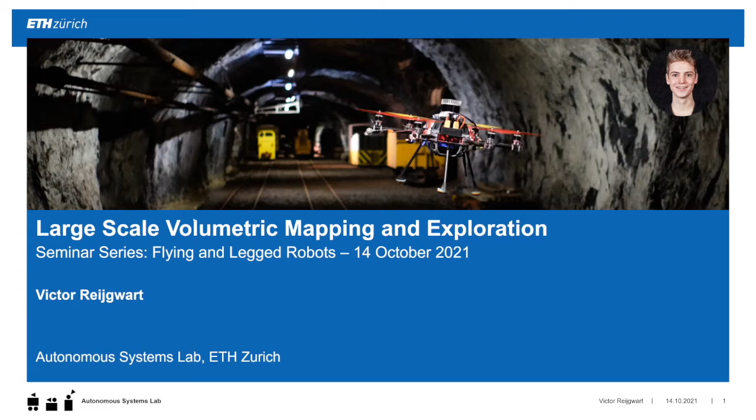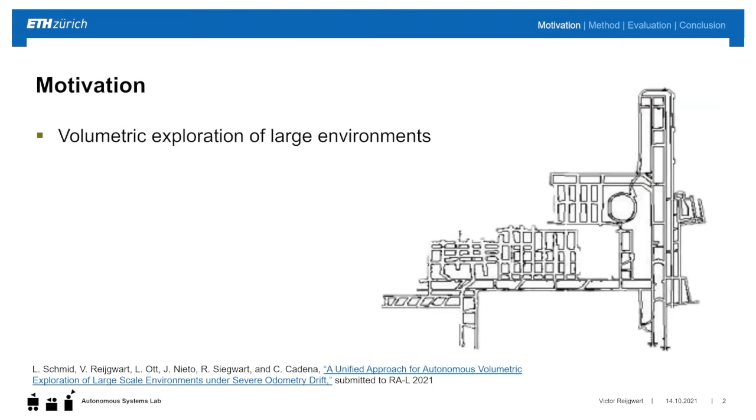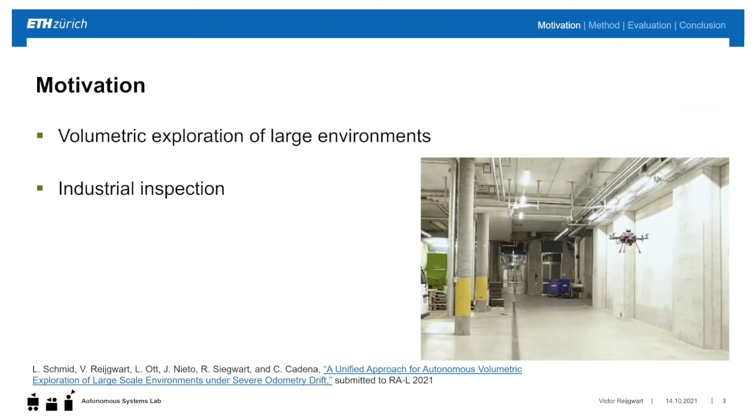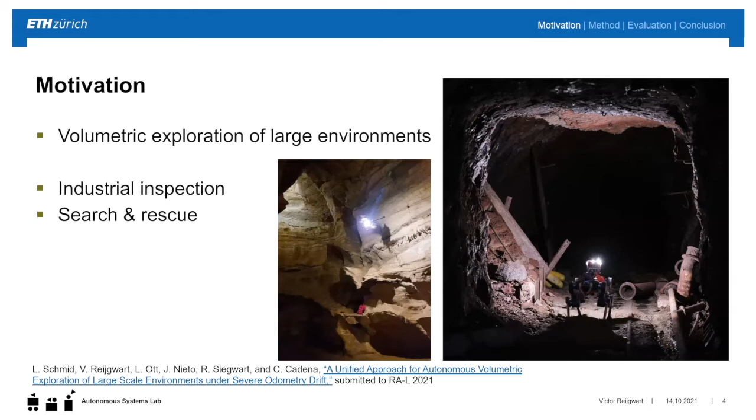Okay, it's working again. So what I'll be talking about today is volumetric exploration of large environments, such as, for example, the mines of the DARPA Subterranean Challenge. And some of the use cases for the results that I'll present would be industrial inspection or search and rescue, which is, I think, a very interesting problem, both technically and also in terms of how it can be used.

So some of the big challenges that we have here are, starting with drifting state estimation. So on mobile robots, in real unknown environments, we typically have to estimate their pose using only onboard sensors. And here, over a longer amount of time, it's almost guaranteed that there will be some drift that gets introduced in their original odometry estimate. So in this small video that you saw on the right, I'll see if I can play it again.

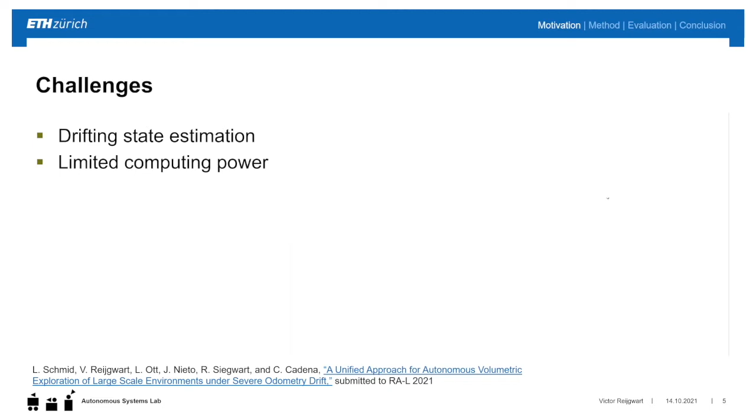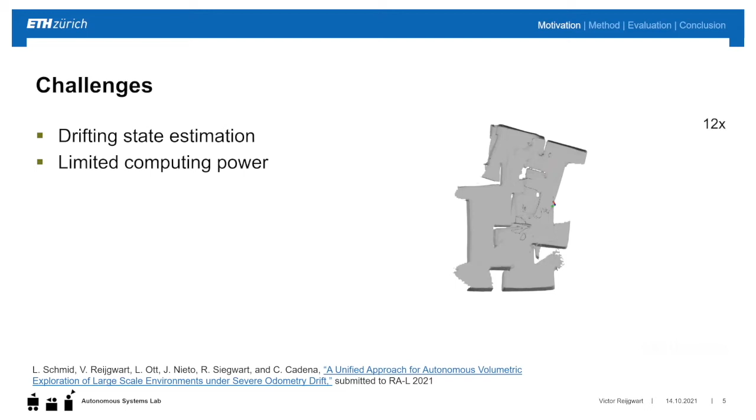You could see that this drift in the estimated position of the robot can also corrupt the map, which eventually could lead the drone to collide with the environment, which is something that for safety reasons we really want to avoid. And then another big challenge on mobile robots is that the computing power is typically very limited, especially on aerial platforms. So in summary, what we wanted to achieve with this work was to create a safe and efficient volumetric exploration framework that functions well despite severe odometry drift.

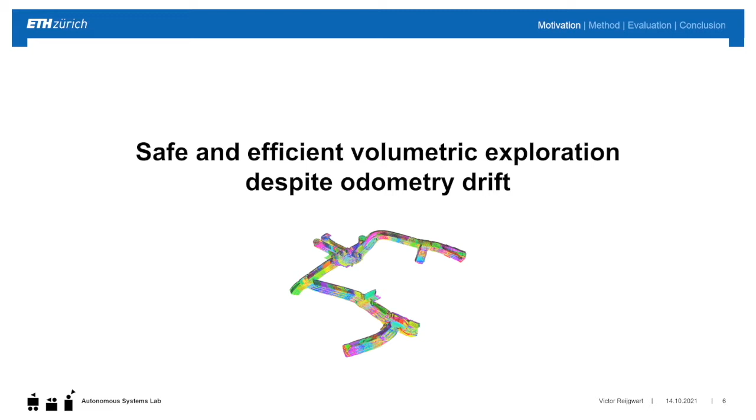So jumping into the system overview, we had two main ideas when developing this. The first one was that we wanted to create a multi-layered approach that tightly integrated both mapping and planning to make the best possible use of the information that the map provided to make the planning more efficient. And this led us to break down the system into three mapping components and two main planning components, which I'll discuss in detail later.

And then the other idea that we wanted to try out was to see if we could break up the problem into the local parts and the global parts and solve them quite independently. And I think the results on this were quite surprising to us, at least. So I'll show those later.

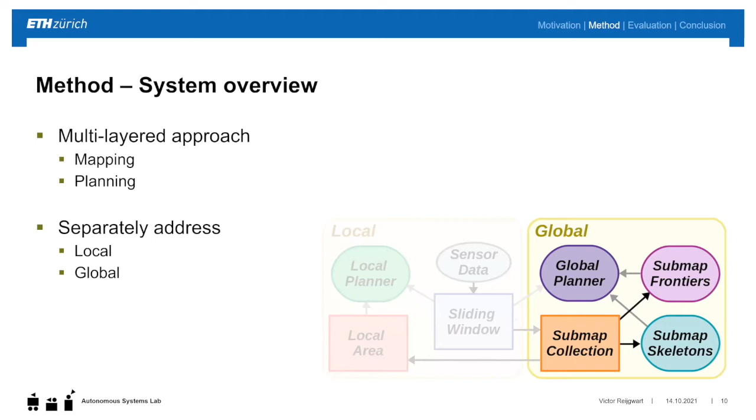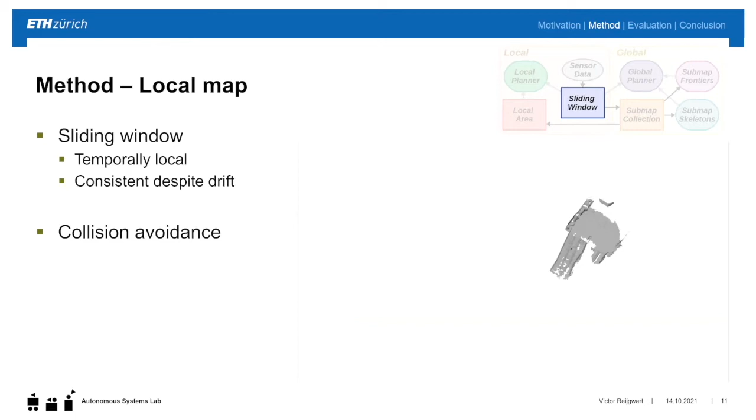So starting with the map of the immediate surroundings of the robot, we chose a sliding window based approach, where we keep all the point clouds that get integrated into this volumetric map in a buffer. And once they leave this buffer, they get removed from the map again by essentially just reversing the TSDF integration equations. And the big advantage of this was that it gives us a map that is local in the temporal sense, and therefore stays consistent, even if there's drifting odometry that causes issues over longer time windows.

So the big advantage of this was that it allows us to avoid collisions, even if the odometry is drifting, because the objects that we would be able to collide with are typically close to the robot and therefore being observed. So thinking about it from a more human perspective, essentially all the obstacles around the robot are still fresh in its mind, so it will not bump into them.

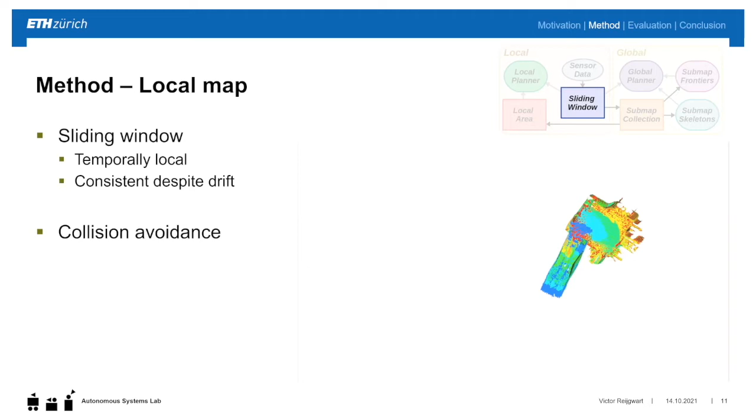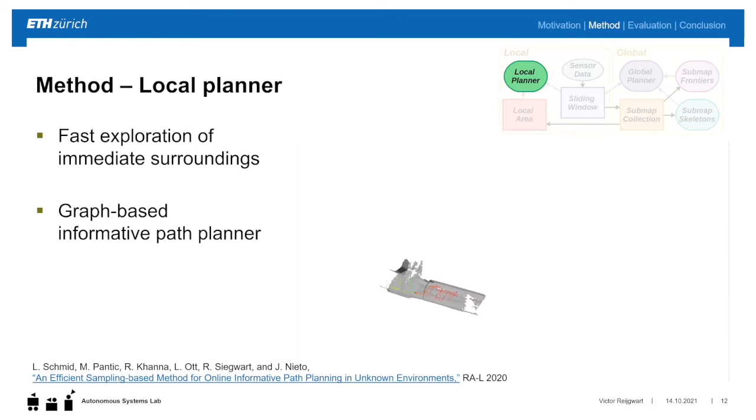Then, of course, we also wanted to have some way to explore, and here we started with a local exploration component, whose goal was to enable fast exploration of the robot's immediate surroundings. And one recent work by my colleague that I worked together with on this project as well was a graph-based informative path planner, which we used here.

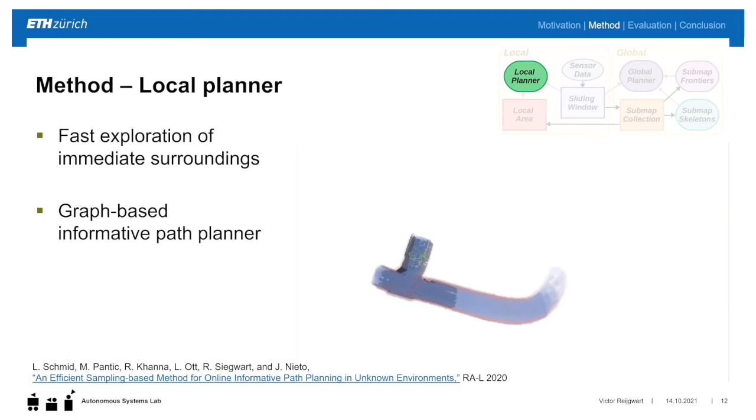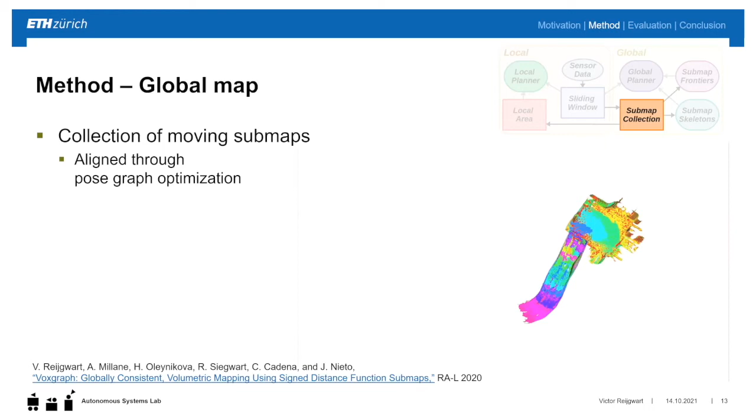And then on the mapping side, we also needed some representation of everything that the robot observed so far, to be able to make sure that it would explore not just some parts, but really everything. And for this, we used some initial work from my side on Voxgraph, which was a framework that makes it possible to describe the world as a collection of moving volumetric submaps that are aligned through pose graph optimization.

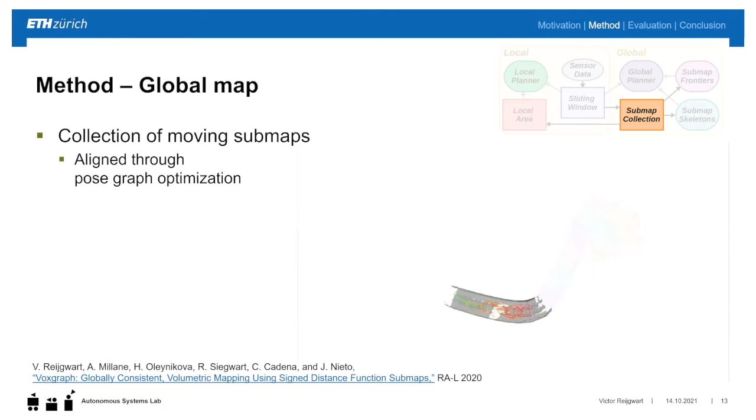So the advantage of this framework was that it introduces an efficient way to represent the entire world in a volumetric sense, but it still allows the map to be deformed to take information from, for example, loop closures or a larger SLAM system into account.

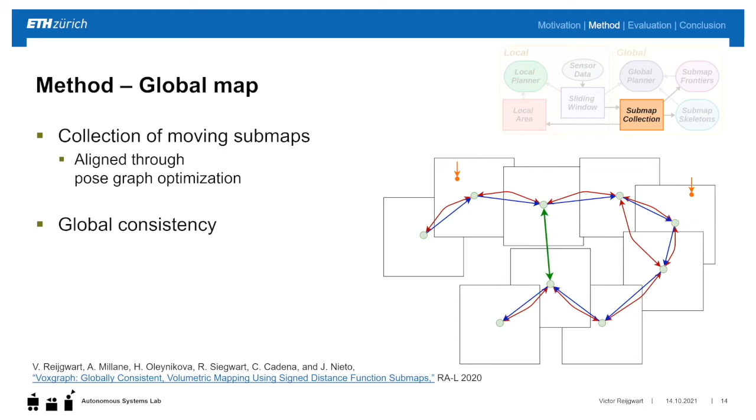So this loop closure information is not available at the time that the sensor data is initially captured, and only becomes available at a later stage. And then once it is there, we would like to deform the map essentially to improve its consistency. And this is made possible with Voxgraph, even online on small robots.

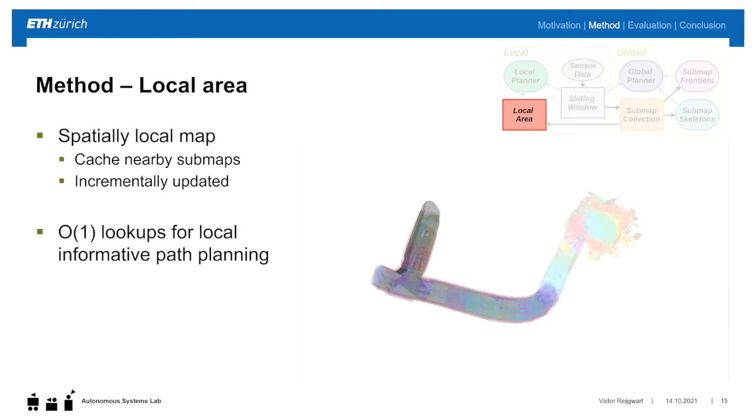Then one challenge for the informative path planner, so for the local planner, was that it evaluates places to go next by computing the information gain at certain viewpoints that it sampled. And for those of you that are familiar with this approach, you will know that this requires the code essentially to perform really large numbers of lookups in the map, because it typically computes it by ray tracing from a given viewpoint throughout the surroundings to see what the sensor would be able to see at that point. And this approach is already very expensive.

It's typically the bottleneck in most volumetric exploration approaches. But for us, if we naively use this global map with all the submaps, it would scale linearly in the number of submaps, which would make it intractable.

So what we propose to do instead is that we introduce a second type of map, or a second layer of mapping, which we call the local area, where we initially fuse all the submaps in the global map that are close to the robot together and update this incrementally. So if the maps move, we don't recompute everything from scratch, but we only update the maps that move by removing them and adding them again at this new pose.

So this made it comparatively actually very cheap to run. And the big advantage of this was that it allows us to, again, perform constant time lookups for evaluating these viewpoint gains, as if we were working with a single large monolithic map.

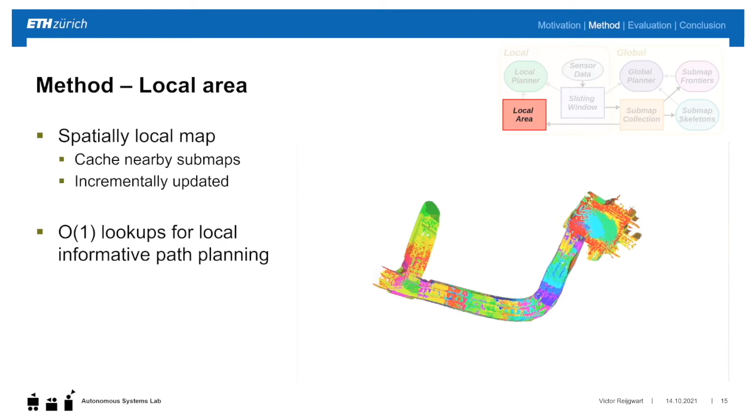Then the final thing that we want to achieve is that we cover the whole environment. So for this, we have a second planner that does the global planning, and it's based on the very common concept of frontiers, with some small modifications to, again, work well with this submap-based global map representation.

So instead of recomputing the frontiers over the entire map every time that it deforms, what we propose to do is that whenever a new submap is added to the global map, we extract frontiers on this submap, which is very fast, as the submaps are typically quite small.

And then at the global planning stage, the only thing that we then still need to do is to check for those frontier candidates only, whether they are still valid frontier points. So this is very quick. It runs in the order of hundreds of milliseconds, and then allows us to still guarantee global coverage.

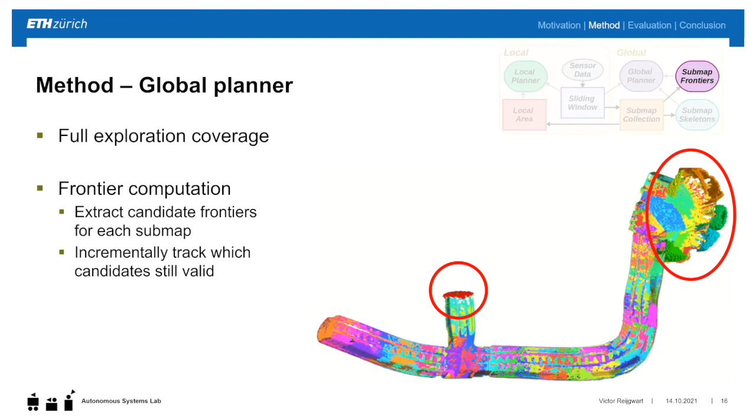Once we know where we want to go, which would, for example, be this frontier in the middle, which is red, or any of the 4 frontiers in the right upper corner, we needed some global path planning approach. And what we used here was an extension of a previous work of one of my colleagues, Laura, on creating sparse topological graphs and using these for planning,

where we create one such topological graph or skeleton for each submap, and then extend the A-star search to be able to jump across submaps. So it would essentially plan in one submap, and then as it reaches an area that's also described by other submaps, it can jump across.

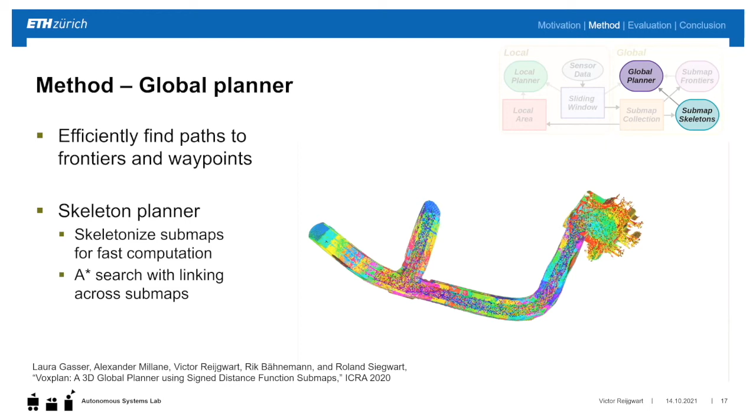And this made it possible to efficiently relocate the robot either from its current position to a new frontier or to an arbitrary waypoint, which could, for example, also be the homing position. Now that I've briefly discussed how the system comes together, let's look at some evaluations to see if it actually works, and especially if our assumptions hold.

So we evaluated it extensively in simulation, because there we don't have to worry about crashing the drone, and we have access to more information for evaluations. So what we used was the Unreal Engine 4 together with AirSim and a custom wrapper to interface it with ROS, all of which, or all the modifications, are publicly available as open source.

And then we ran this, because the simulation is very expensive, on a big server computer with an Intel i9. But I think more interestingly, we also tested it on a real platform, which I forgot to update the name, but it's called Kiwi. It's a hexacopter from the MAV team in our lab with an OS1 64-beam LiDAR and a small Intel NUC i7 computer.

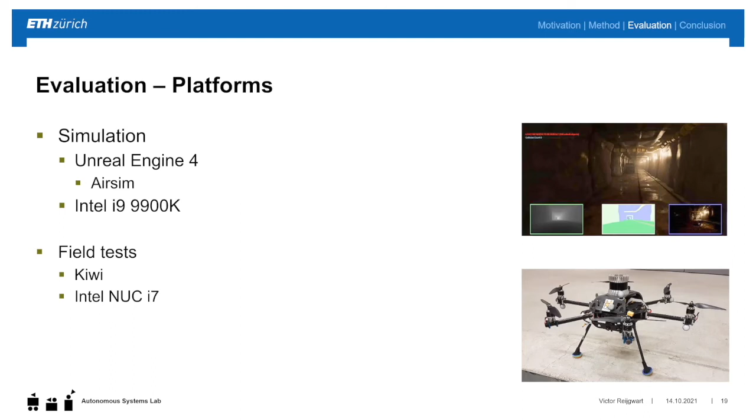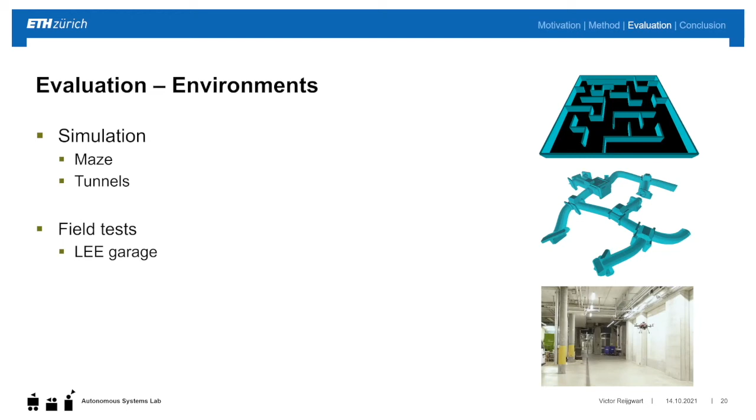So in simulation, we evaluated on 2 environments, the first one of which is a maze to allow more intuitive comparisons to other planners and other papers. And then we also tested the system in a very large tunnel network-like environment. And for the real tests, we have by now tested it in quite a few different environments, but I think the most interesting one for this presentation was the LEE garage, because there we have the most metrics.

Then we compare against 2 existing approaches, which we considered to be the state of the art, at least at the time of writing this paper. The first one of those is Active3D, the paper that accompanied the work from my colleague, which introduced the graph-based informative path planner we still reuse here for the local parts. It's based on expanding and rewiring a single tree in an RRT star-like fashion, optimizes the utility in a global context, and is mainly focused at high performance. So there's no safety considerations there.

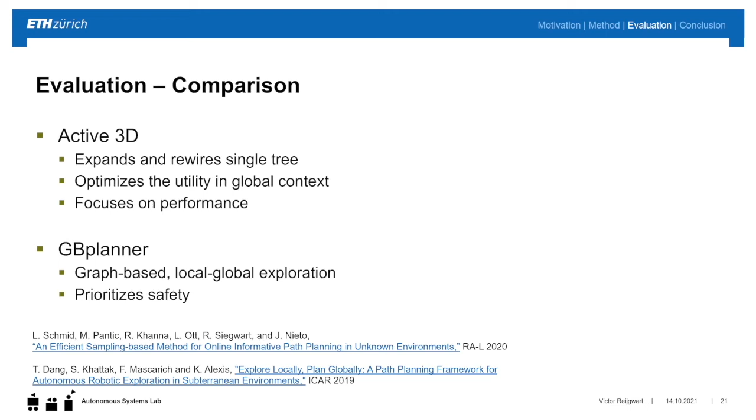Then on the other hand, we also compared to GB Planner, which is also a graph-based planner, but the nice similarities are that it also uses this concept of local and global exploration, and is mainly focusing on improving safety.

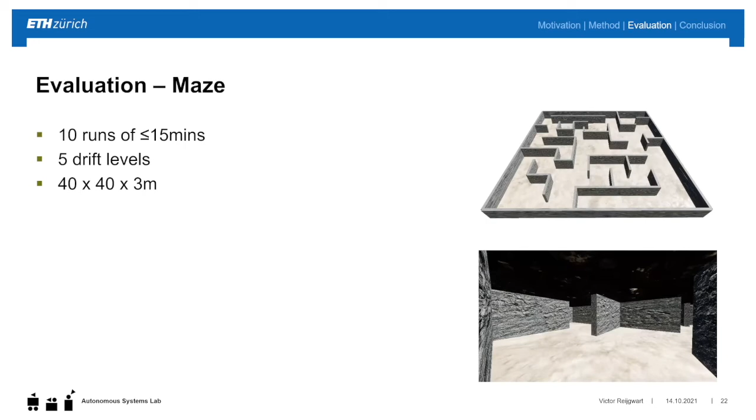So the maze environment measured 40 by 40 by 3 meters, and we simulated 10 runs under each configuration, capped to 15 minutes, because otherwise it would just take too long. I think this already took several days to run. And then we simulate 5 different levels of drift for our planner and the 2 planners that we compare to.

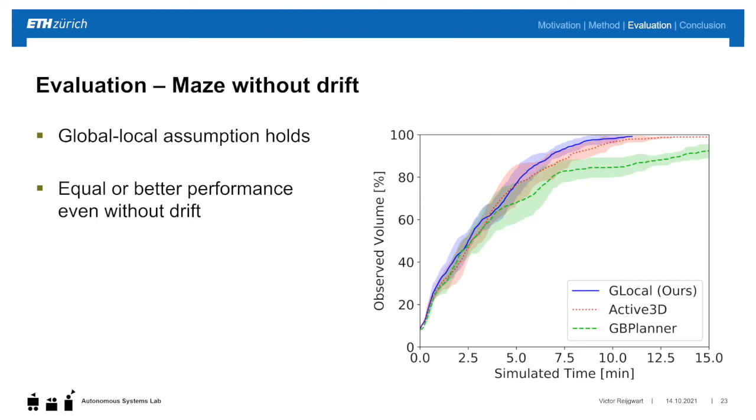So I think the most exciting finding for us was that the global-local assumption actually holds up very well. It holds up so well that it outperforms the local approach only, even if there's no simulated drift. We'll see later that it's mainly a lot safer, but it's also very fast, and perhaps even faster than other approaches. Then things get most interesting when we start looking at what happens when we simulate drift. So we simulated 5 different levels, starting with no drift at all, up to very severe drift.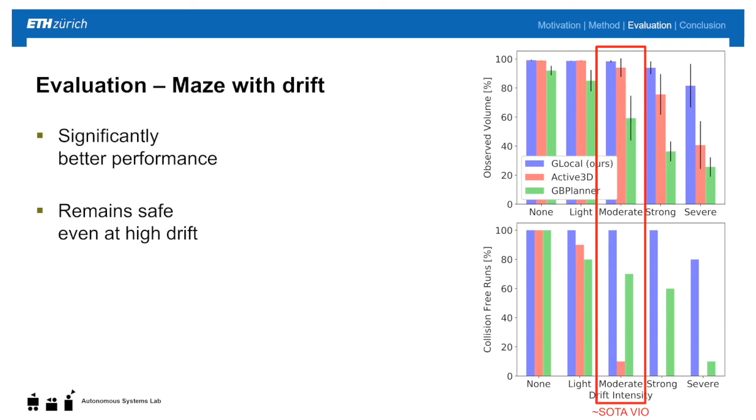And the first thing you would see is that the performance of the exploration, so the amount of observed volume over time, holds up much better with the approach we introduce compared to other methods. But most importantly for us was that it remained safe even at high levels of drift. And to get an idea of how large the drift was, I think state-of-the-art visual inertial odometry systems would have a drift level that roughly corresponds to what we labeled as moderate.

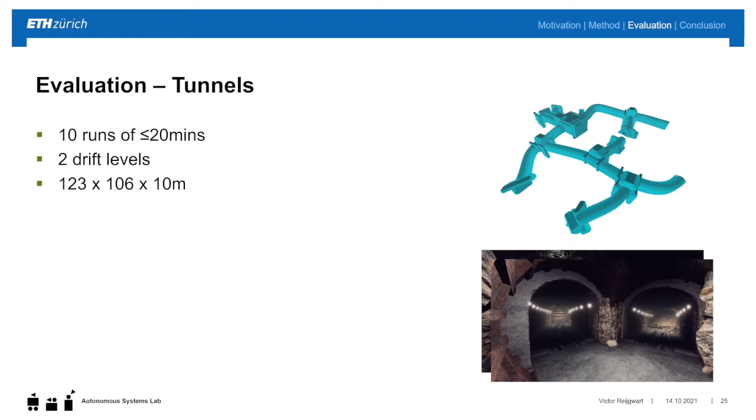So then in the tunnels, we again simulated 10 runs, but because the environment was so much larger, we truncated it to 20 minutes and only simulated 2 levels of drift, no drift at all and a moderate drift. This environment measured 120 by 100 meters and had height differences of up to about 10 meters. So you can see in the pictures that it's essentially a large network of tunnels with some intersections and many dead ends, which are interesting for exploration.

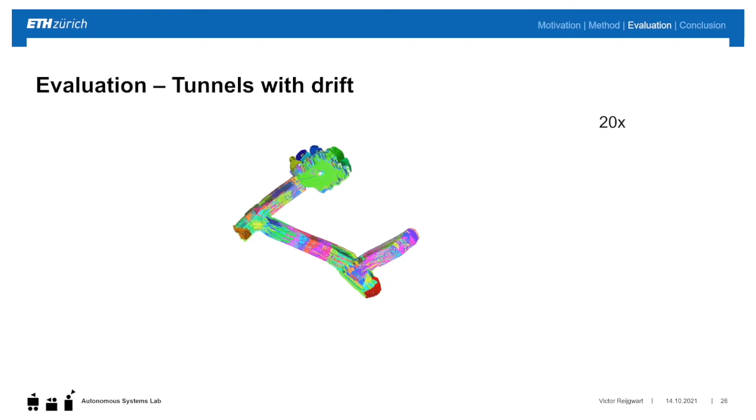So showing you first some qualitative results when we do simulate drift, you can see that the approach works well, and mostly explores using only the local information. But whenever it gets stuck in a dead end, it identifies frontiers and then relocates to them. So at the bottom, that frontier is not reachable due to some temporary corruption in the map due to the drift that we're simulating, but you can see that it then successfully picks another frontier and continues from there.

And even though the drift is very large, you see that the map slowly recovers and the planners keep functioning as if there are no issues with the map. I think the code that we were running here for the mapping has been improved quite a bit since this video was made.

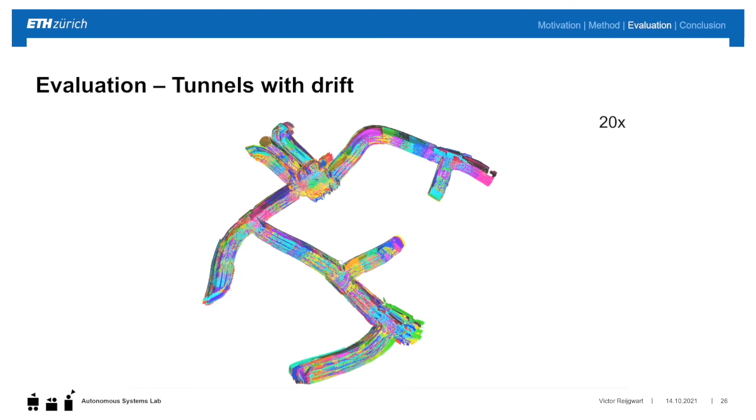With the newest versions, you will not see it move around like this anymore. But for us, it was actually quite interesting to see how the planner would do if it moves this much. So in this video, it was still noisier.

So then qualitatively, to get an idea of what the effects of the drift would be if we don't compensate for it, on the left you can see that the map gets completely skewed and you get a lot of double walls and essentially different breaks in the map. And if we compensate for it using this pose graph optimization with submaps, then you get a map that looks like it should.

So again, sorry, Victor. Yeah. Can I ask a brief question about the previous slide? I missed what the colors represent in the right. I should have mentioned this.

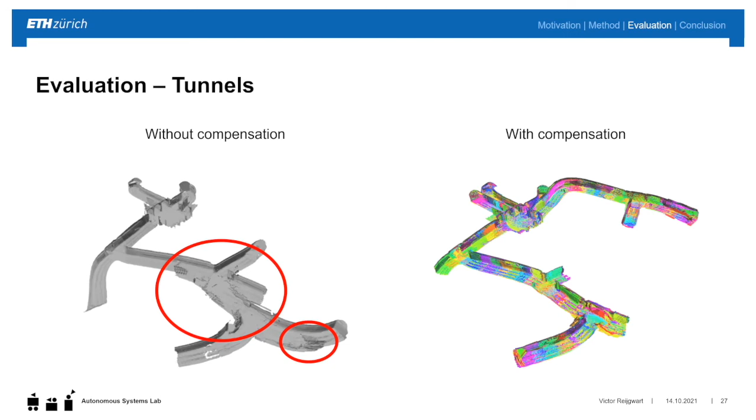So there's many colors because each submap is colored based on a unique ID that it receives, and it looks a bit fuzzy, but this is actually good in general because it means that all of the submaps are aligned quite closely together, and then it becomes pretty much random which faces of the triangle get rendered and which corresponding colors are shown, because these depend on the submap that the mesh element or the triangle belongs to. Okay, I see. Thanks. Thanks for clarifying.

So looking again here at how it performs without drift and then with drift, we can see that the approach still performs very well, even if there is no drift. So again, this reinforces the idea that the assumptions are valid. And we can see that when we do simulate drift, it also keeps exploring. It explores a bit slower, but it still explores well. And out of 10 runs, we only had 1 crash, whereas most other planners either got stuck or crashed within the first 13-14 minutes.

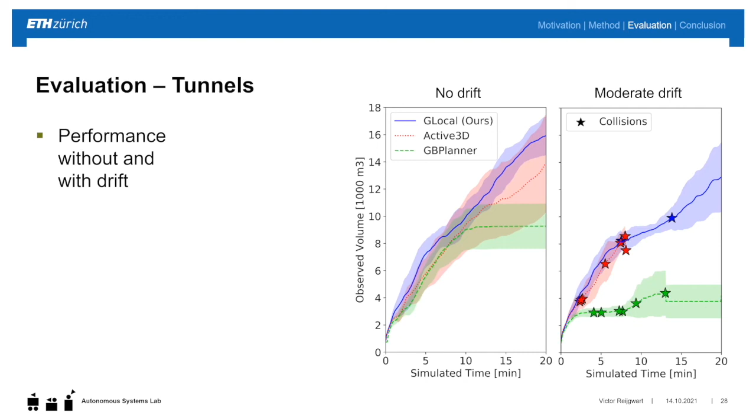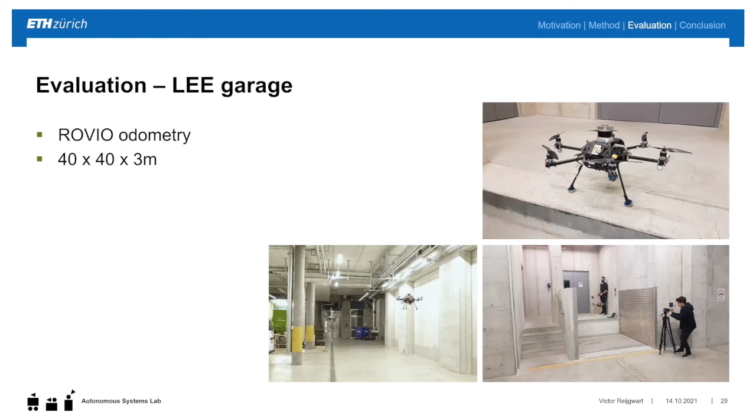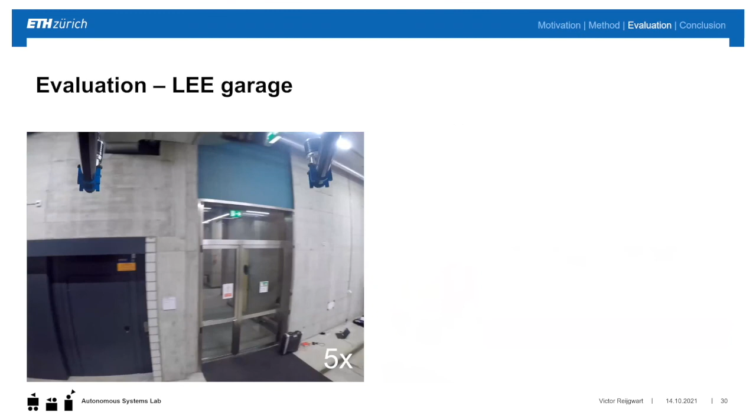So then for the real experiments on hardware, we used odometry from ROVIO and flew in the underground parking lot under our lab. And I'll show you a video to give a better idea of what it looked like. So you can see that the robot plans locally and explores what's around it, but also takes a peek into different corners. And from time to time, the global planner kicks in and essentially brings the robot around a car to take a look at what it can see there.

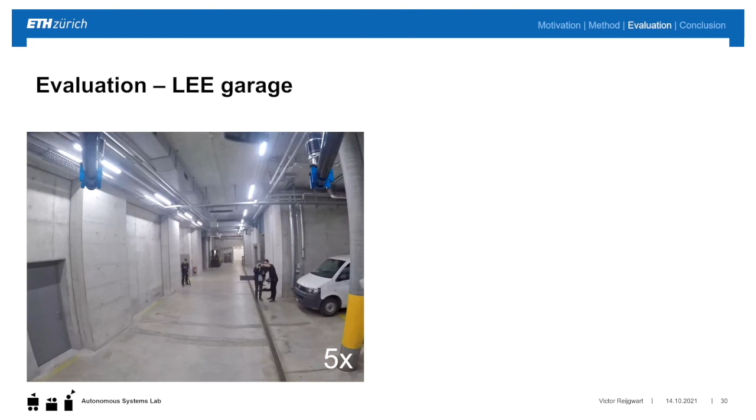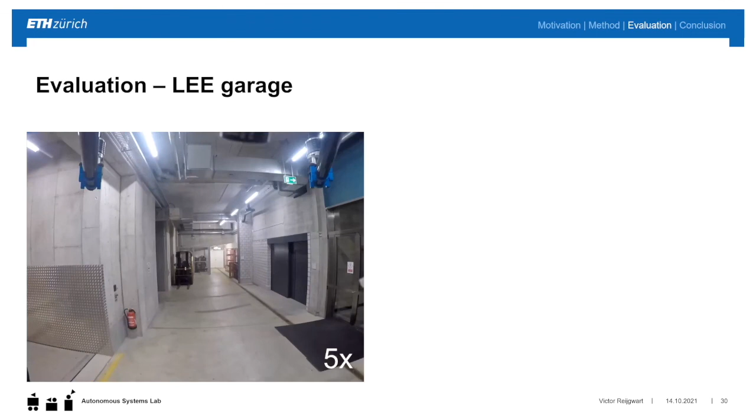I think the camera feed is not giving the best impression of what the robot sees because there's a LiDAR on top that has a 360-degree field of view. But hopefully this still gives the best qualitative idea.

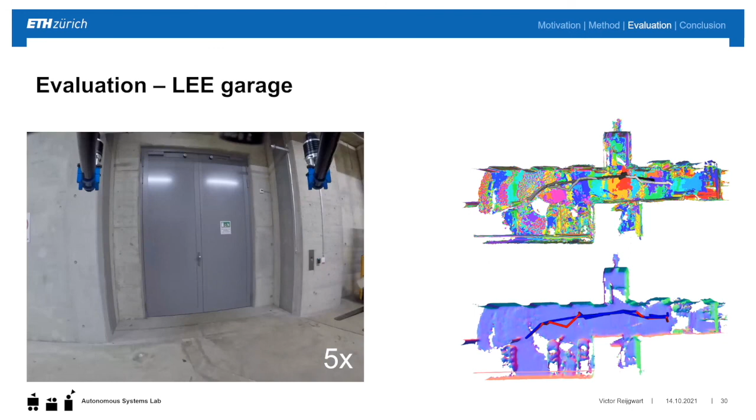So looking at the maps that we got, you can see that it looks like there's a double wall in the top figure, but this is just because, this is a top-down image, there's a section there with a part that sticks out a little bit. But you can see that the map is consistent. And at the bottom in blue, you see the trajectory of the robot in local planning, and in red in global planning.

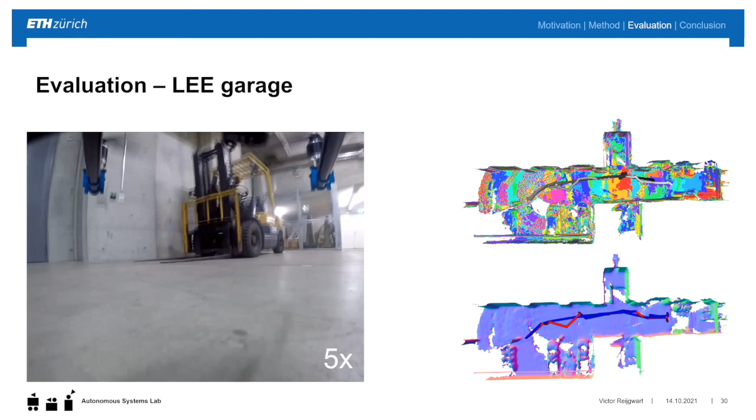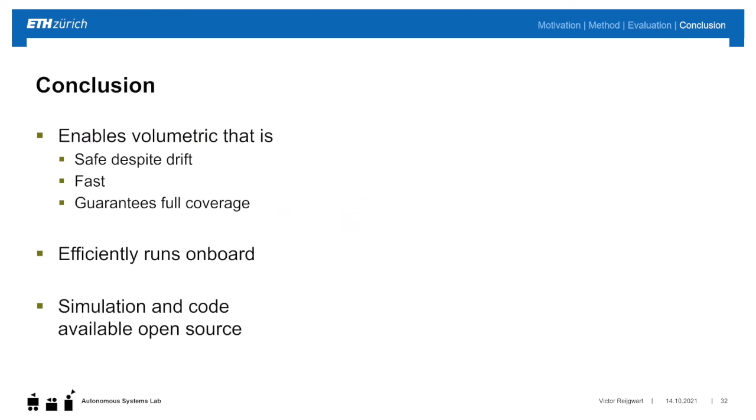So in conclusion, we propose a method that enables volumetric exploration that most importantly stays safe, even if there's a lot of drift in the odometry. It's also fast and efficient enough to run on real platforms, and it guarantees full coverage. So it will keep exploring until there are no frontiers left. So in other words, that the environment is watertight.

And finally, all the code that we used for both planning and also running the simulations is online. So it's available on our GitHub, and if you have any questions, I would be very happy to talk about it.

So some future work for planning is that we're almost finished with an extension of this work that allows us to plan for omnidirectional vehicles, or omnidirectional MAVs, where for example, one advantage would be that by flying in a vertical mode, we can get through a narrow doorway where it wouldn't be able to go through if it was flying horizontally.

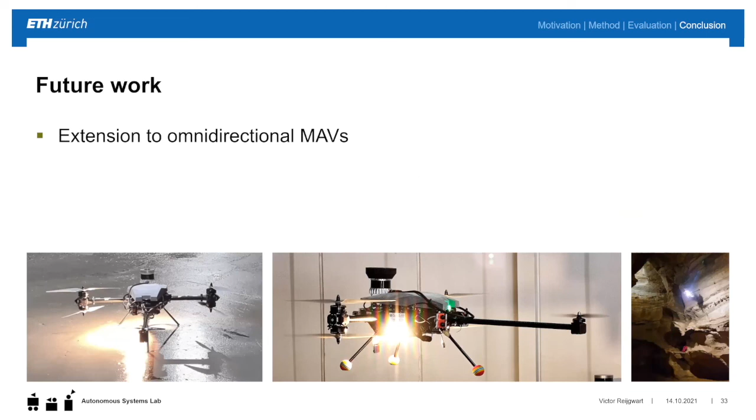And another extension, in collaboration with the Autonomous Robots Lab from Reno that now moved to NTNU, that we collaborated with for the DARPA challenge, is a multi-robot version of this planner. So this combines both their work on GB Planner and our work on GLocal.

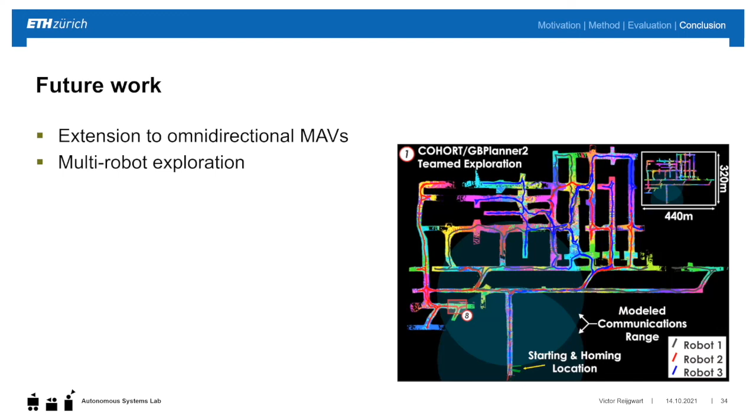And that, I think, concludes this presentation. I'll leave this video playing in the background and would be very happy to answer any questions you might have.